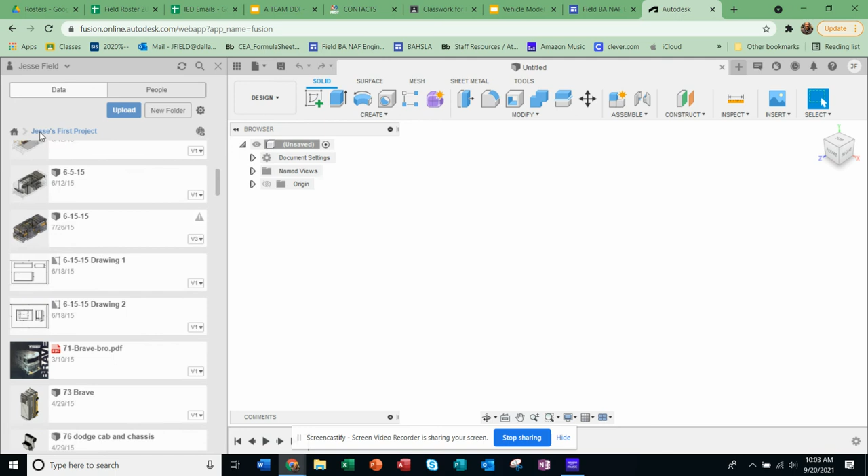From home, I can go to new project. That's right, see how I hit that back arrow there? And I'm going to do a new project. In this case, your folder is going to be Moblox, and then your name.

So, full name please, first and last. And then what's your period? Like that, okay?

And then double click it, open it up, and that's where you're going to come over here and start modeling. So you're going to do a new design, and it's already kind of opened for you. I'm going to close that window out now.

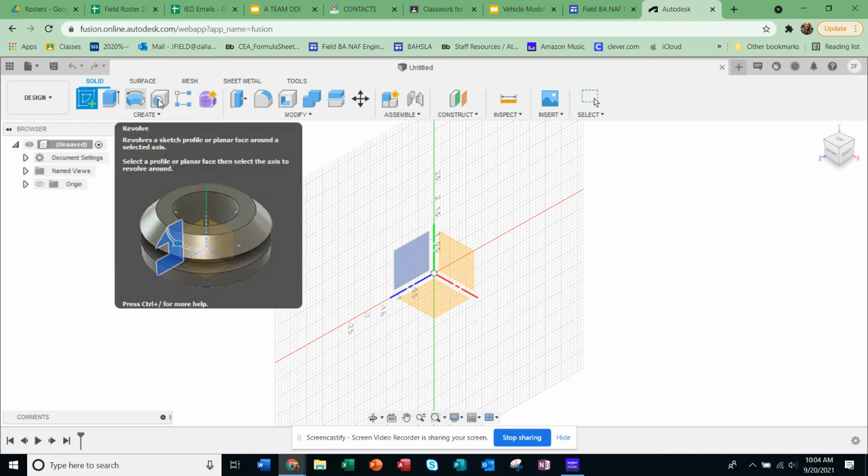So we're going to probably want to start by creating this from the right view over here. The first option here is create a sketch, that's the thing we do most often in 3D modeling, so that's why it's first. The second most often thing we do is extrude, then third most is revolve, and then putting a hole in something is the fourth most. So they've really categorized this by most used tools.

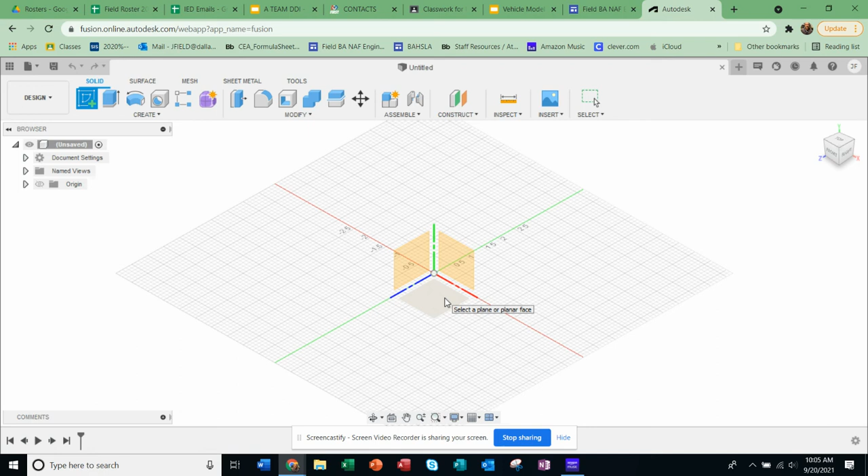Again, you can see the cube up here to the upper right-hand side, the view cube -- that's the front, that's the right side, and that's the top. So that'll be the front or the right side plane. That's the front plane, and that's the ground plane. So I'm going to start modeling this on that side plane, so I go ahead and pick it.

And it's basically just starting as a rectangle with a 1.5 and, I'm sorry, so the right-hand side -- that's right, I picked this space over here. So it's going to be a 6.25 by 1.5 inch rectangle.

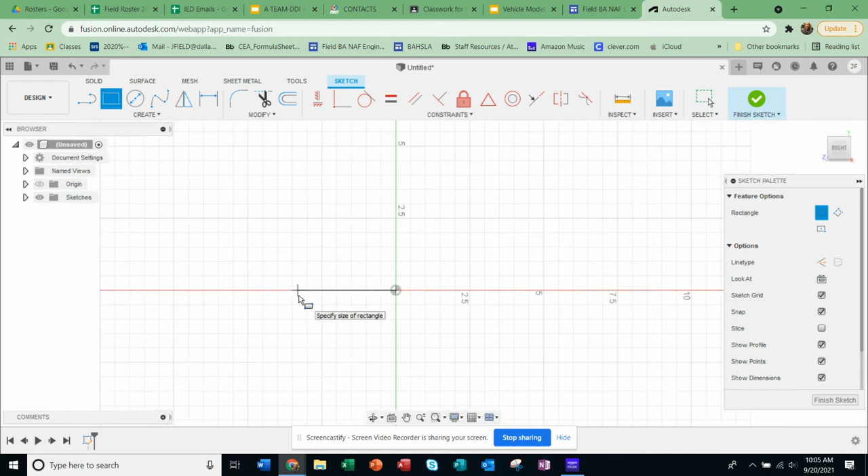And then here's the 2-point rectangle, so you're just selecting 2 points. I start at the origin, and then I pull up, and you can see how it's stretching out, and it shows you inches -- you can type those in. If I hit tab, I can go to the next one and just type in 1.5. And if I hit enter, we'll put the rectangle in.

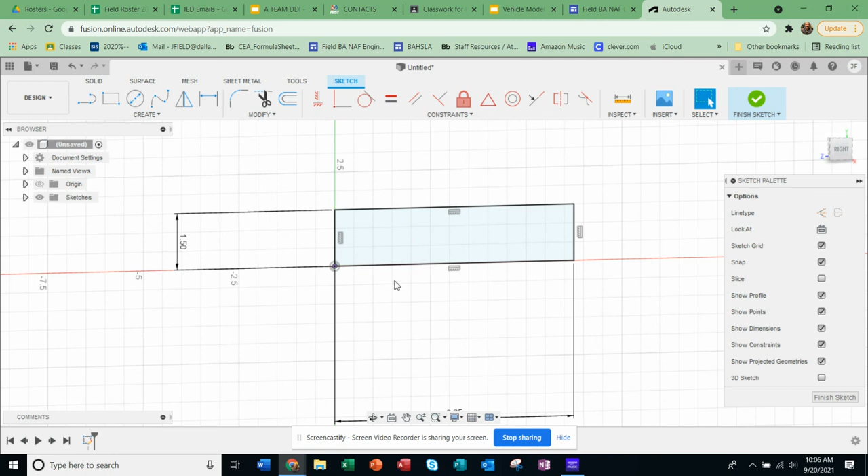So 2 big things: scroll is 2 fingers on the trackpad or the scroll button on the mouse. And then when you want to rotate a model in Fusion 360, hold shift on the keyboard and then the middle mouse button. I don't know, I'll have to figure out what the cheat is if you don't have a mouse.

The basically only shot you've got is just moving this cube around, that's one thing you can do. And you have to click on your trackpad and then use the other finger to rotate. That works okay, that's fine.

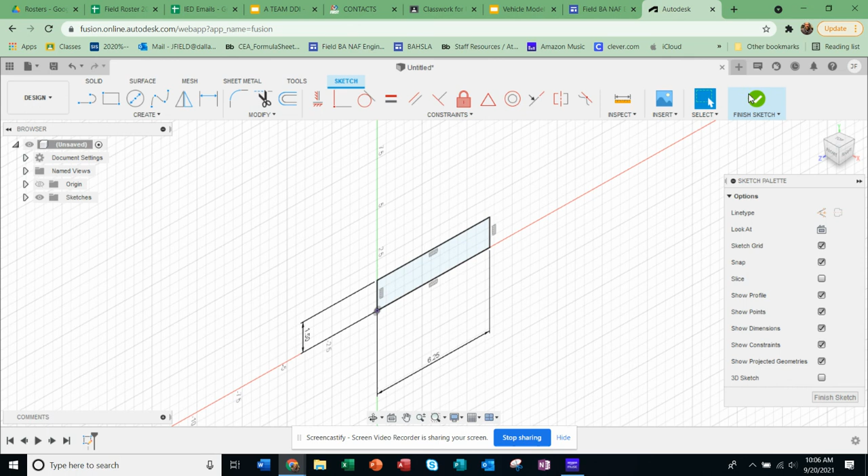Anytime you hit the house, by the way, here on the view cube above it, you're going to go back to this isometric view of your universe. And that's handy when you're doing any kind of modeling -- just go back to the home position. In this case, I'm going to hit the green check mark to finish sketch because I'm done with it.

And of course, the next most common thing is you extrude something. Fusion gives you these little handlebars or pull tools, and that's really handy to do this. One cool thing I could do here, guys, before I even create this is do it symmetrically.

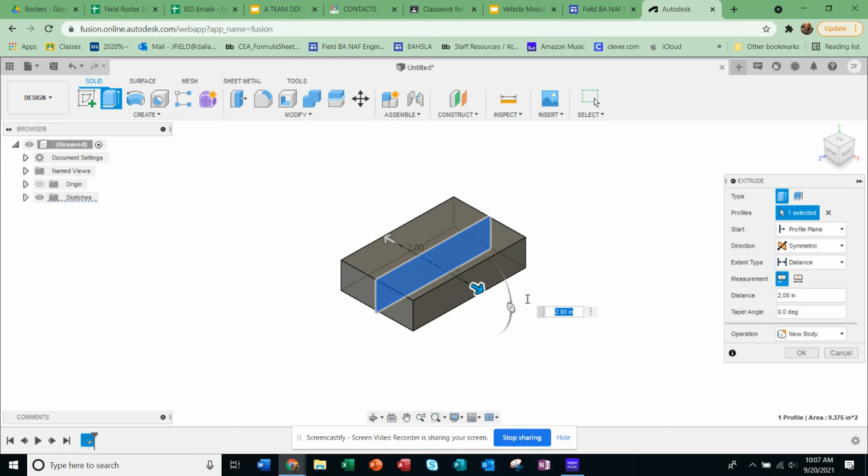And that really is handy when you're modeling, because you can define symmetry of your part. That way, when you model half of it, it will automatically know that the other half should be the same. So I'm going to pull that out -- 3.25, I think, yeah.

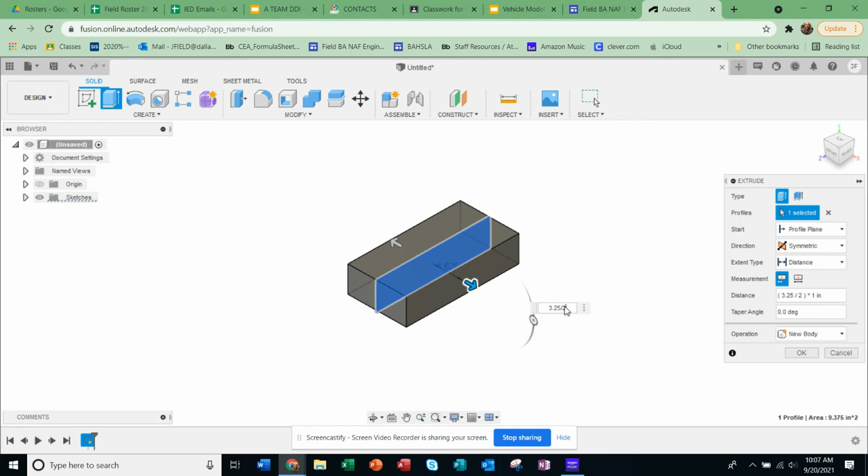The problem is that's pulling it out 3.25 to both sides, and that's a total of 7 almost. So what I really want to do is divide by 2. See how it actually did the math when I hit the slash and put in the 2.

Now I have my Automoblox started, and for today it would be enough if we just went in and, watch how I'm going to spin this around, grab the back edge too. So I've got 2 edges selected, see them in blue, and I can grab this handlebar and just kind of pull those up.

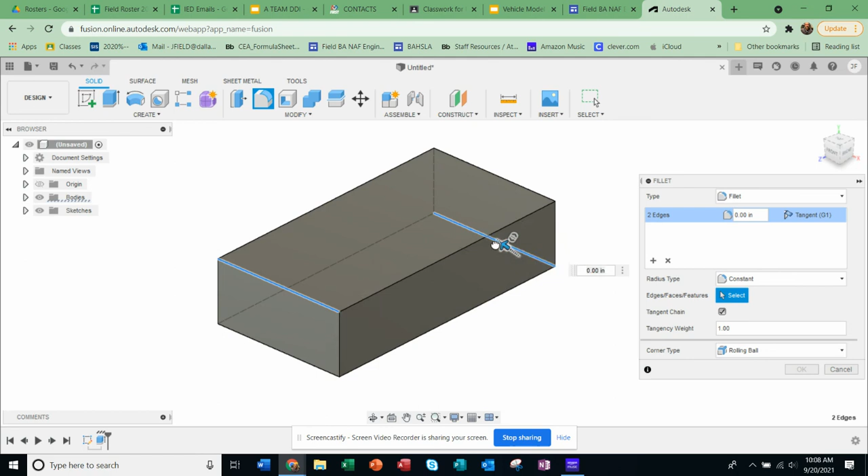I'm adding a fillet feature here to start to model that Automoblox. I think I'm just going to go 1 inch so I can type it in. And you've got a good start right here, okay?

So the next thing we're going to do is, if you look at the Automoblox, it actually has rounded edges on this face too, and then it has a sculpted front. We can add this as a separate top and start modeling the wheels.

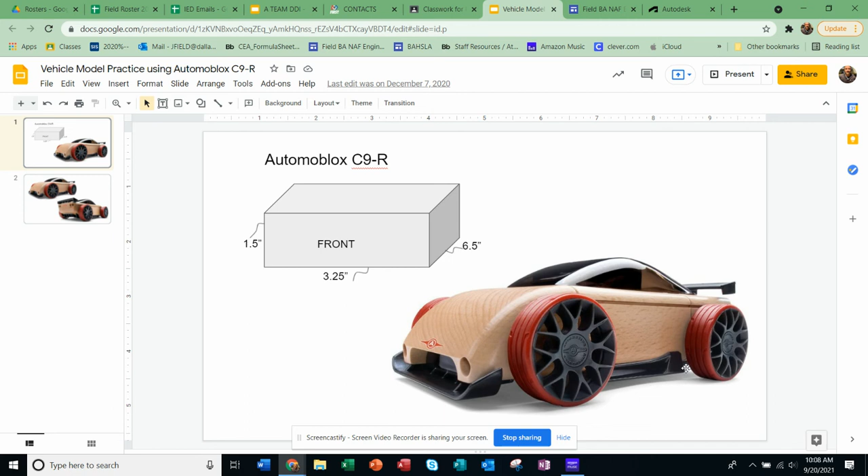You can put the fillet in along that top edge. So again, it's kind of rounded all the way around. So watch this, I can select that face.

I'm just going to check out something, I'm pretty sure. I was looking for the Symmetry Tool. It's more so for form when you're working in form, but I thought there was a way to do that. But that's okay.

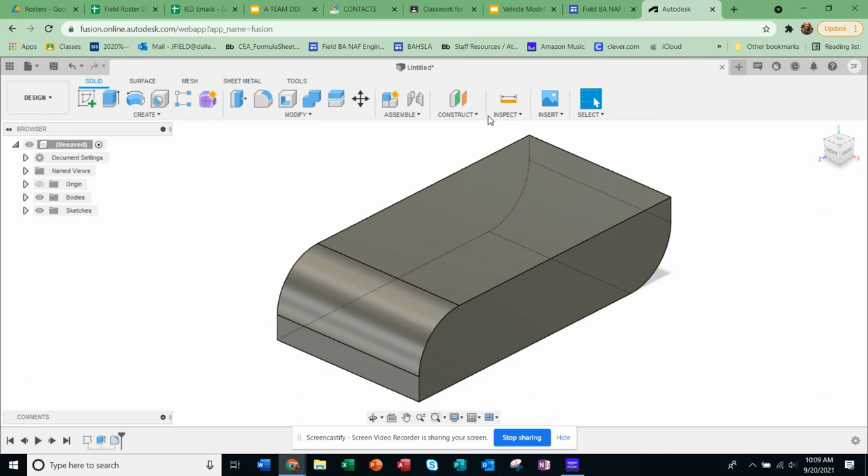So what I'll show you is you can select this whole side and then select this whole side. I'm going to hold control when I do this, so the both sides. The control button on the keyboard, I'm holding it, and then I'm selecting the second side, and I'm going to fit it in there. I think that 0.15 will work right there, that'll work for us.

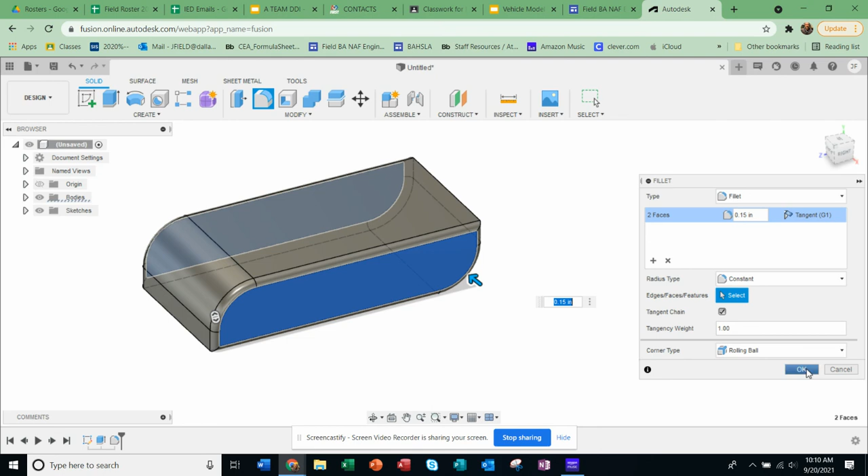I'm going to look at it from the right-hand side here, and that's a pretty good start. Now, if I look back to the model over here, you're going to see this cutout and then these two holes. Why don't we start working on that today?

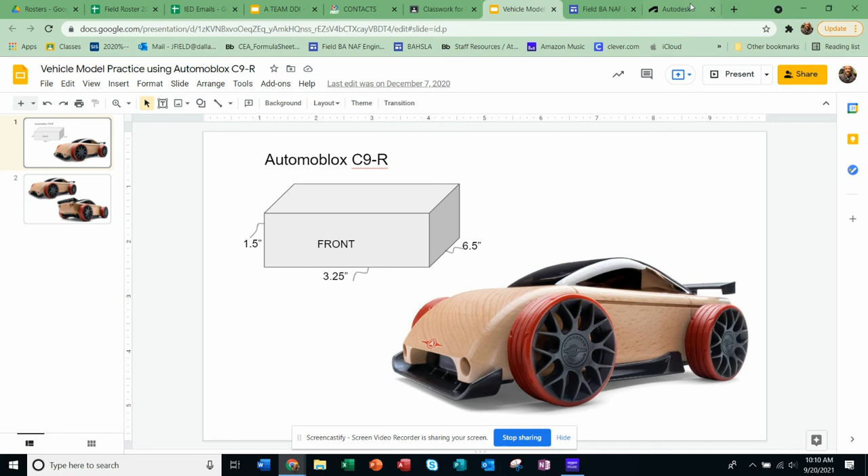So if I view this thing from the front, select that face, and then I can right-click my mouse, or I can go up here and select it, and I can say Create Sketch.

And then in the sketch environment, you see the toolbar changes, and you get these sketch tools. In this case, I'm going to always start by creating just a line in the middle, at the midpoint.

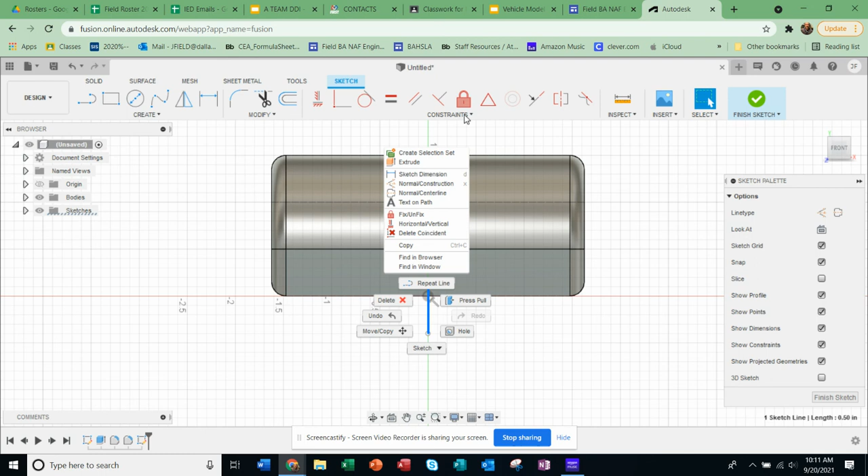And really, I can right click and make that... I think it's actually, so over here on the right, let's see, I was going to make this a construction line. I thought that was an option in Fusion 360. I think maybe they moved it up here. I'm really not sure, sorry about that. I'll come back to that. It's been a couple years since I've used this, so I'm just a little rusty, that's all.

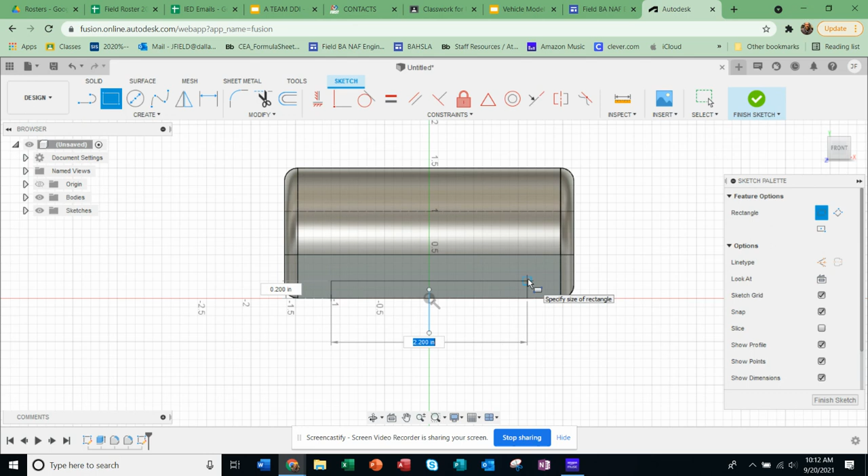But I know what to do here. So what I'm trying to do is basically make a rectangle for that cutout. And this has got those grid lines, and actually it's kind of handy because I think that's exactly halfway. I can see it's got 1, 2, 3, and then 1, 2, 3.

There's other ways to do that with this line offset tool here. You can do that, and there's midpoint constraints that you can add to things. I'm going to work on showing you what these things are later. Let's just play with this and have a little fun first, okay?

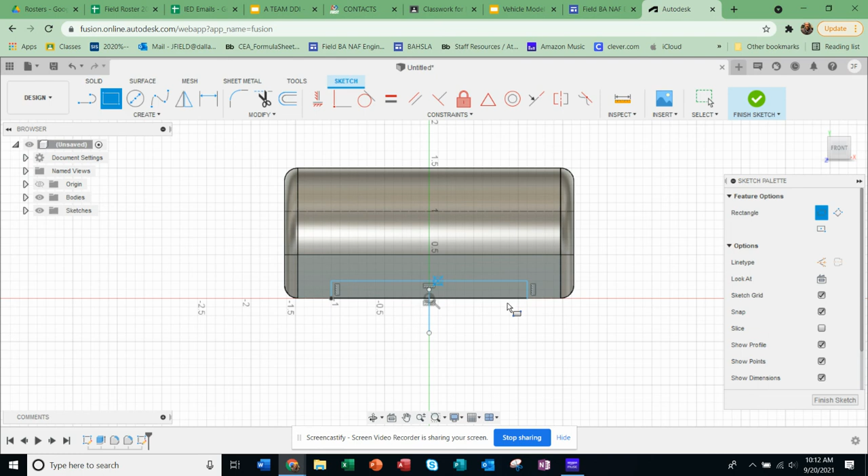So I can actually work with just that, and I'll show you what I mean. So if I hit Finish Sketch, go back home, I can zoom in on that face right there, and I can extrude with it. But in this case, I'm going to cut.

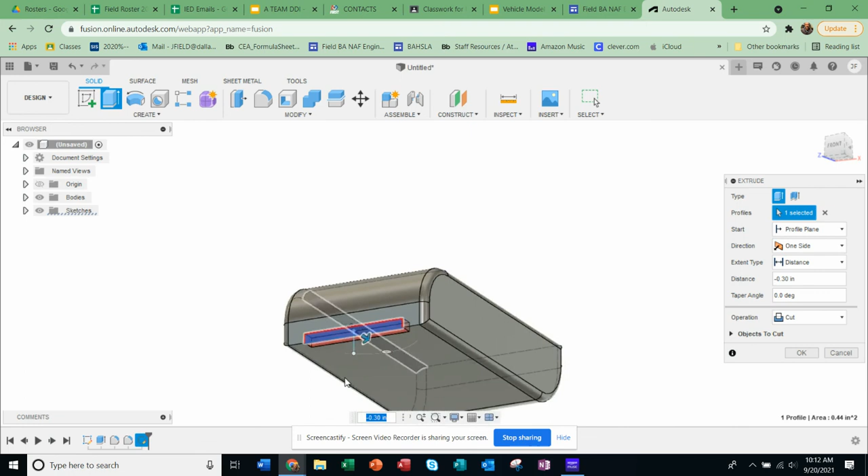0.3 inches looks like it would work fine. So sorry, I lost my model here, I'm going to scroll back out. And again, over here for the tool, what you want to ensure you're doing is cutting. So operation here defaulted to red, which means you're cutting away something, and that's good. And objects to cut, sometimes you need to pick that.

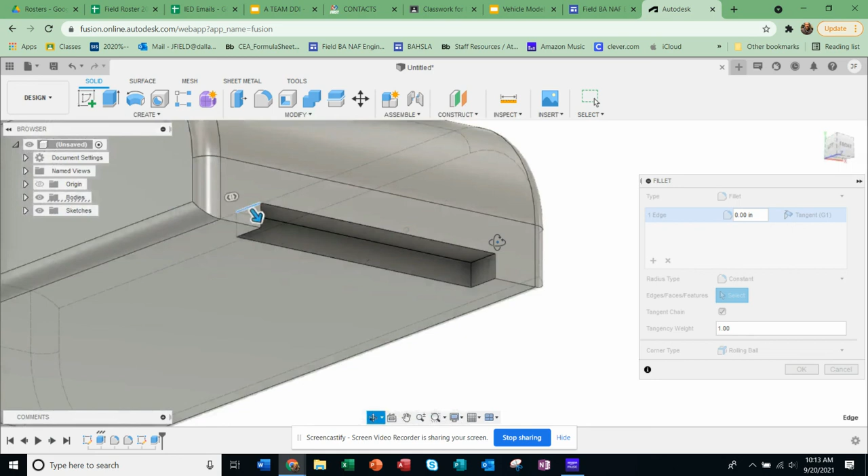So let's see, there we go. And then I can actually come back in and fillet those as well. Again, I'm going to do both sides, so I pick the other side too. So you see that?